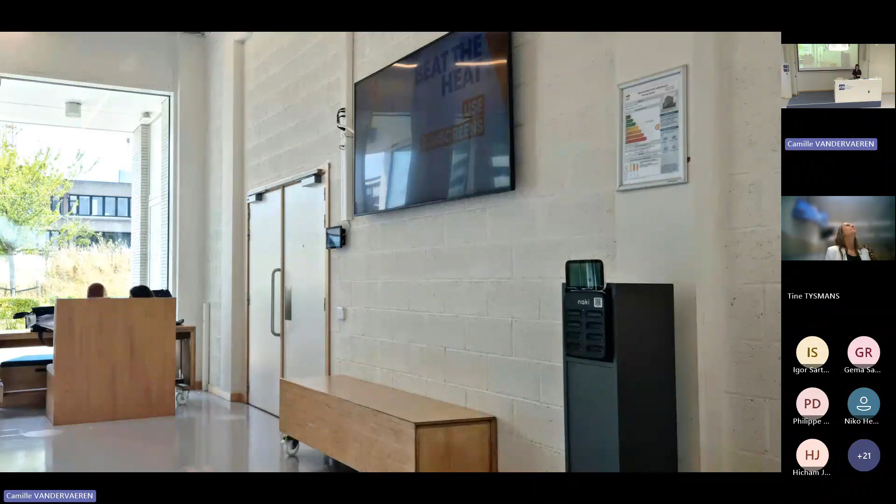Yes. Did you notice when you entered this building, you receive some building information in the form of this little signage panel that is now more and more common in public buildings in Belgium, in the EU, and abroad as well. That shows you how much energy is consumed by the building and if there is any kind of renewable energy production in this building.

And it's great because we're trying to reduce the energy consumption of buildings. We're trying to phase out of fossil fuels. But this doesn't show the whole picture, right? There is one crucial element that is not visible on this picture, and it's the material aspect. Because buildings are responsible for a large consumption of material and a large part of the waste we are generating.

Actually, half the materials we are extracting from the earth are used in the building sector. And the building sector will then produce approximately a third of all the waste that we are generating. So as architects, builders, or as anyone who is making decisions about buildings, if you are renovating your house, for example, you have a role to play in trying to reduce this material flow and reduce this waste.

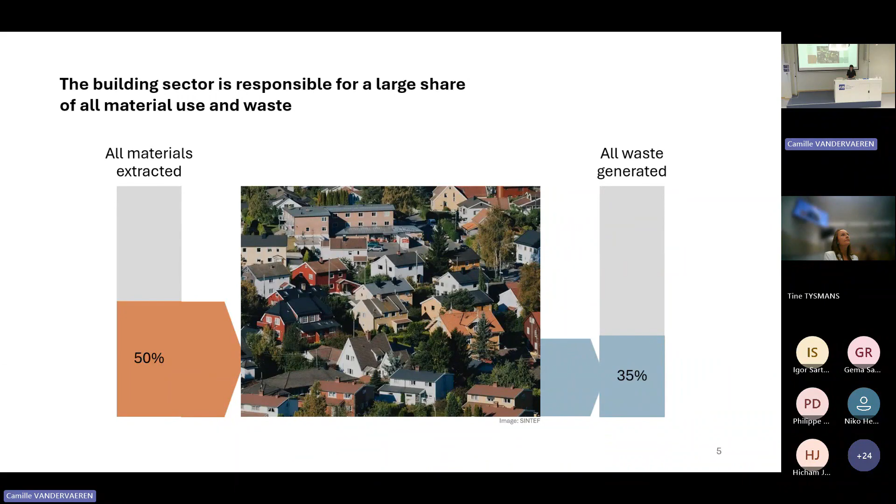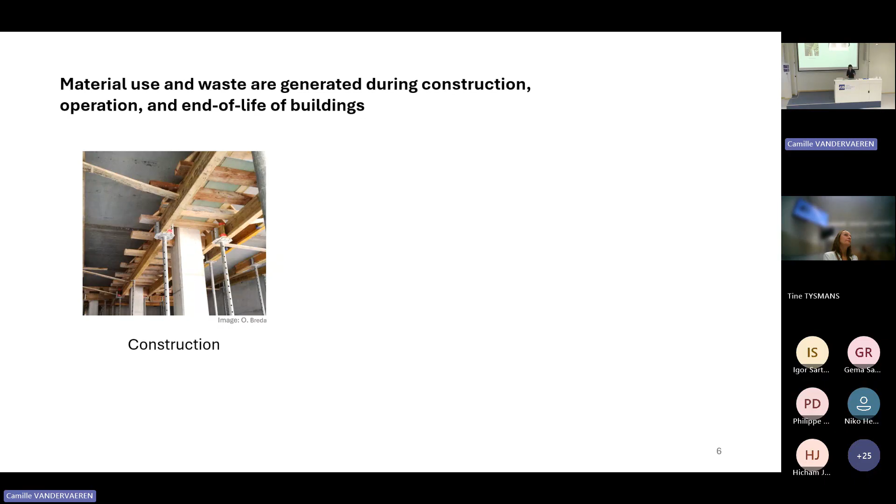And I'm not only talking about the waste that is generated during construction of buildings. As you know, there is always a container on the construction site where some waste material ends up. But there's also some waste and some material consumption during the operation of buildings. That means all the maintenance, all the repairs and upgrades we are doing to our buildings to make them fit our evolving requirements. And obviously, there's a lot of waste that is generated when we are demolishing and renovating our buildings.

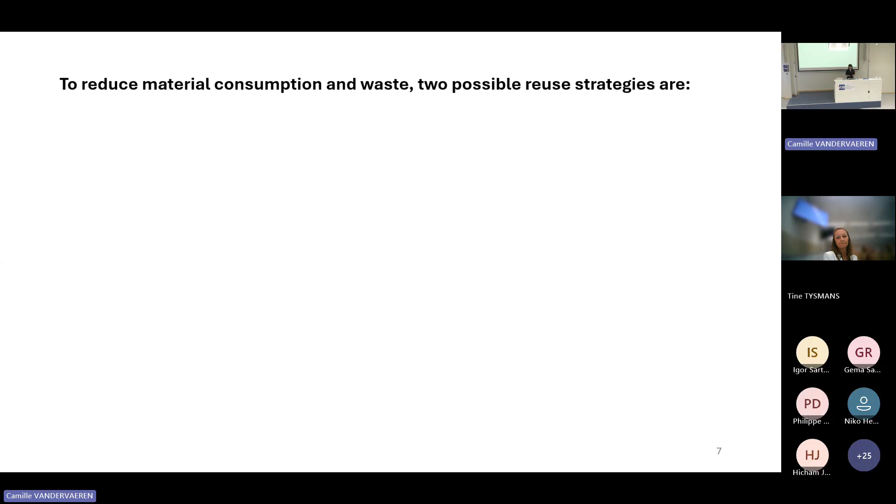So what can we do about it? Well, to reduce material consumption and to reduce waste, there is a concept called reuse that you can use, and actually two possible reuse strategies. The first one is to design with reclaimed materials. And that is not to be confounded with recycling, because reusing reclaimed materials means taking materials from existing buildings, cutting them, reclaiming them, transporting them to a new location, or sometimes somewhere else in the same building, to use them instead of using new materials.

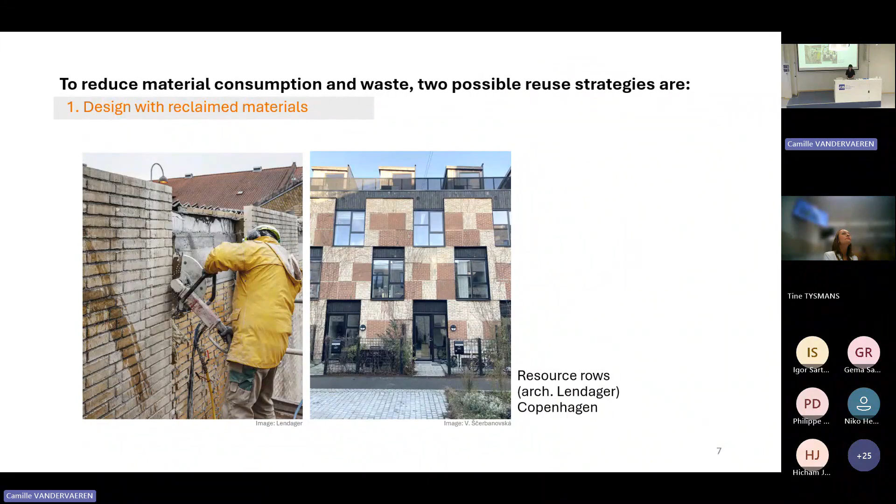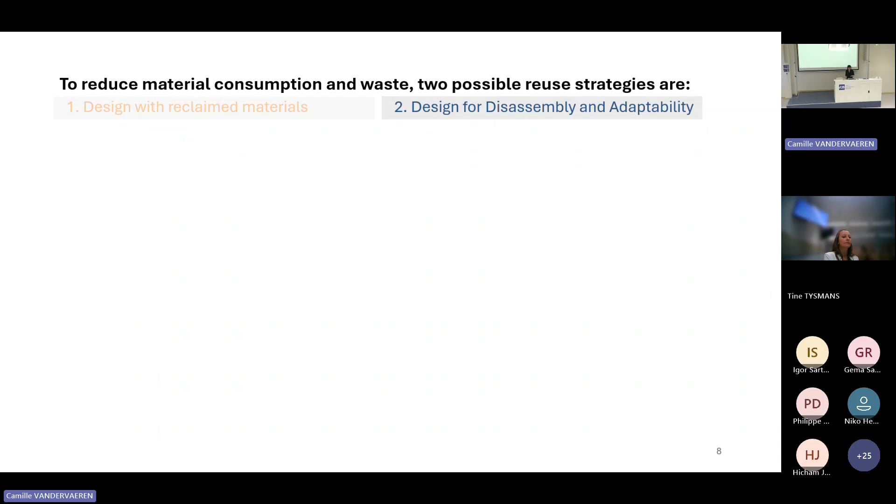And we have an example here where the architects decided to saw brick panels from a building that was going to be demolished and transport them to install them in a new building, in this case in Copenhagen. And the other reuse strategy that I will talk about in this presentation is called design for disassembly and adaptability. As we know, our needs are evolving, our regulations are evolving, what we expect from a building is evolving. So why do we want to build something static that will not evolve easily? Well, that's a problem that can be addressed with design for disassembly and adaptability.

And that means, for example, using building elements that can be easily removed from buildings with reversible connections, or having visible ventilation equipment and lighting equipment in case of necessary upgrades or repairs. And in this case, the Circular Retrofit Lab is an experimental building here on the campus of the VUB. It's testing out and trying to go a bit extreme in these design for disassembly and adaptability concepts. And you see, for example, a raised floor that grants easy access to the water pipes.

But DfDA doesn't have to look experimental or unconventional. It can also have a similar appearance as a normal house. For example, in this case, the Facadeclick system was used in this building to build a facade, not with mortar-fixed bricks, which make them very difficult to reclaim and reuse, but using a plastic insert within the bricks so that they can reuse them more easily.

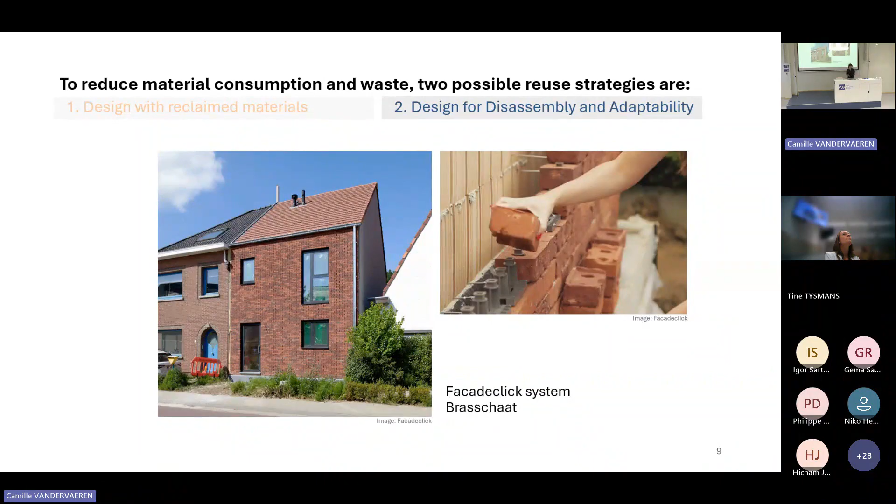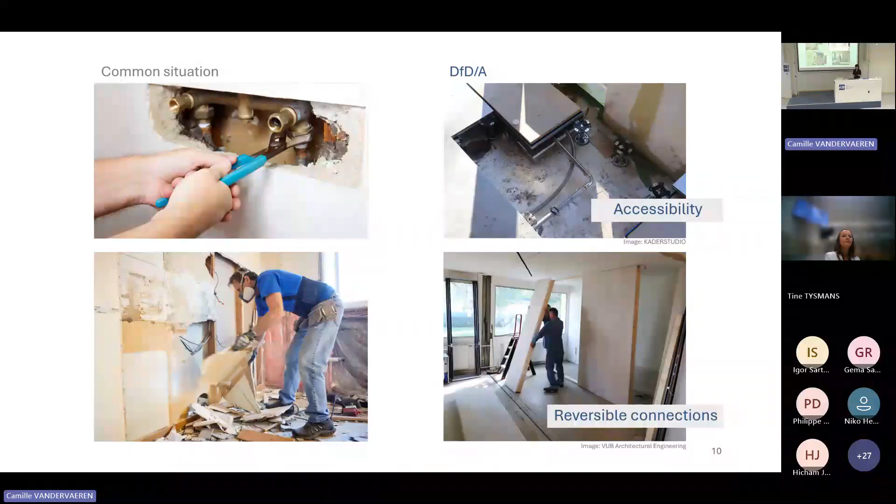So yeah, I could keep on and talk about reuse and design for disassembly for hours, but what I want you to remember for the rest of the presentation is that with the DfDA approach, it's important to have easy access to the building parts that are most often replaced or changed in a building, and use reversible connections so that we can safely and without waste change or adapt buildings.

So that is great because those strategies are becoming more and more popular, more and more put forward in architectural practice, in education, in policy. So we see that more and more, but we have to remember that it's not a goal in itself. The goal is to reduce waste and to have better material management, right?

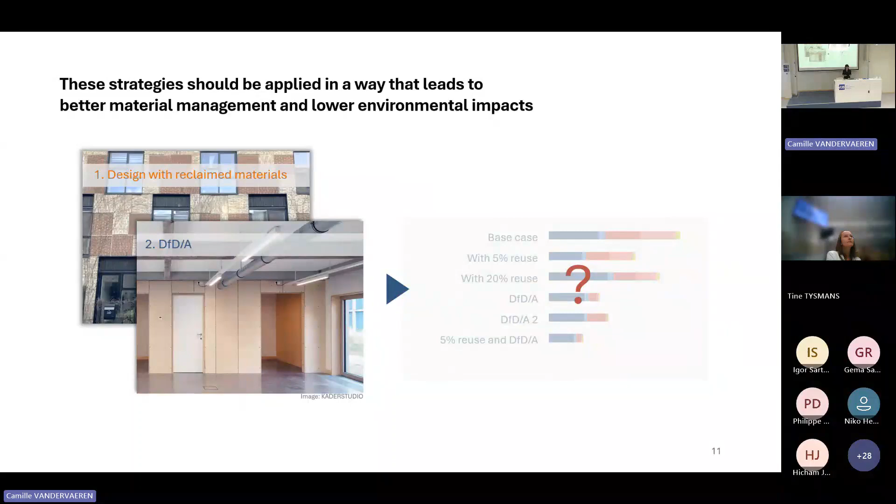And it's not enough to know that, okay, we'll use reversible connections, so we'll have a circular building, or we'll reclaim some elements, so we'll have less waste and less material consumption. No, it's a bit more nuanced than that. We want to know how much and where and what would be the impact of implementing those strategies in the building. So we want to have a way to measure and estimate the future material flows and the future environmental impacts of buildings that integrate reuse strategies.

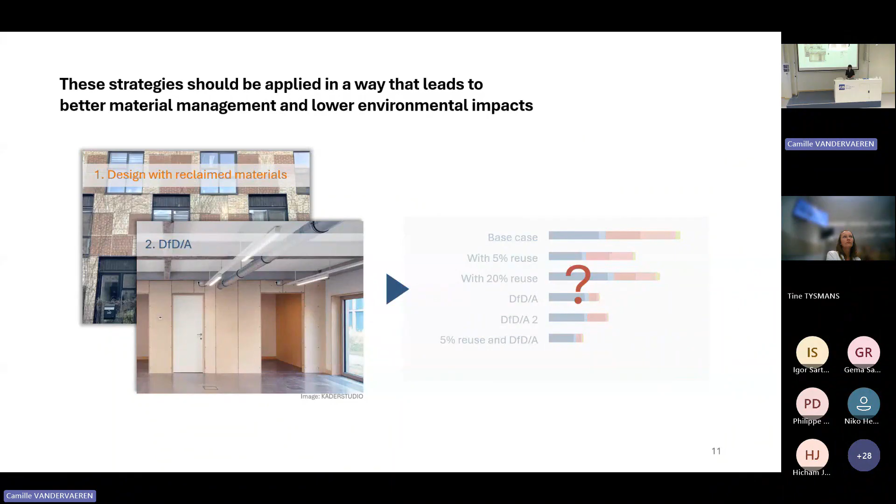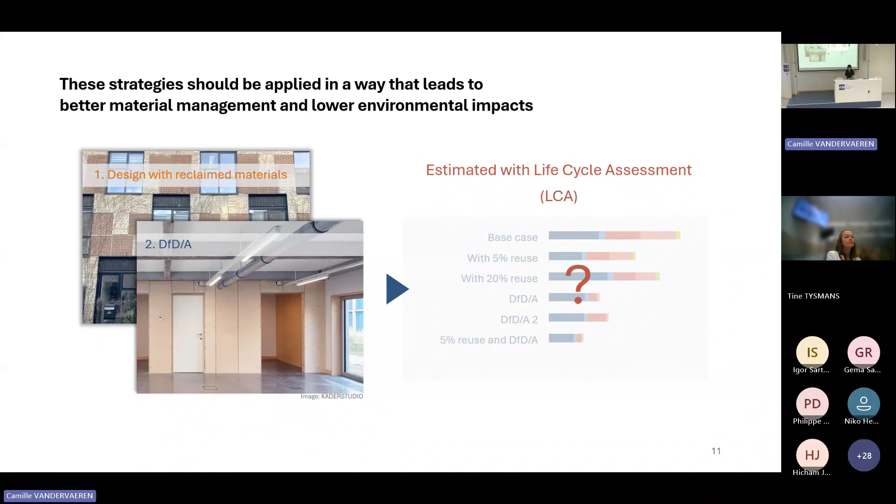How can we do that today? Well, we are lucky because there is a method called life cycle assessment, LCA, that allows us to assess the environmental impact of a building or product, and not only today during the construction, but with a life cycle perspective. So now I'm going to give you a very quick basic overview of LCA, and then I will raise some points of what I see as limitations in LCA that could be addressed with alternative approaches, and then we'll dig a bit more into two of these limitations.

So LCA uses material and energy consumption data to estimate the environmental impact of products. And to illustrate that, I will take a very simple and recurring example in LCA. Let's take an espresso machine. With a life cycle assessment perspective, we will look at the production of the machine, its use, and its end of life or disposal. And for each stage, we will look at what kind of materials, energy, waste, and emissions are taken in and generated by these processes.

So we'll have some steel and some plastic that are used to produce the machine, and that will create maybe some waste. And when we use the machine, we'll use coffee grounds, water, energy that will make coffee, hopefully, and then some coffee waste, steam. And then at the end, we will try to disassemble and treat the different parts of the machine. Right. This machine, hopefully, if everything goes well, we build it to last 15 years. And logically, the LCA will also encompass 15 years of the life cycle of the machine.

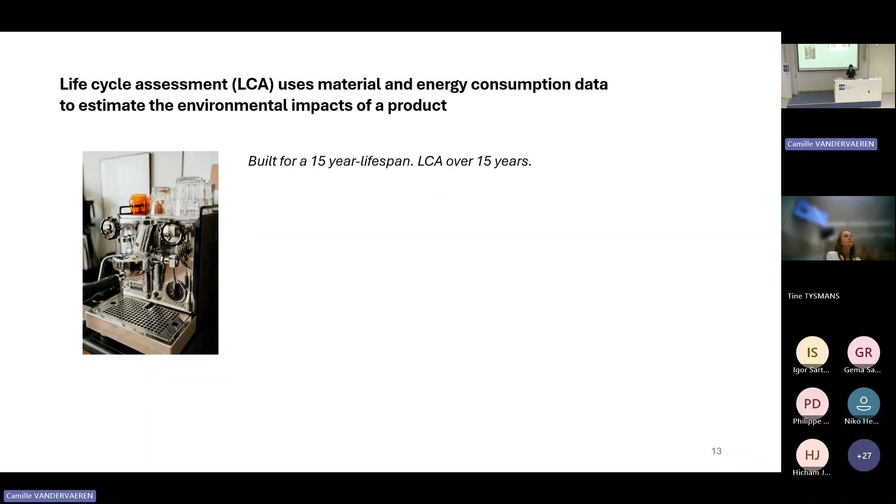Now, if we take an example in the built environment, let's say a simple brick that is made for 200 years or more. But because we use it in a building that will generally last 50 years, or have a major renovation after 50 years, we do an LCA over 50 years only. So there's already a first discrepancy between the lifespan of this product and the scope of the life cycle assessment.

And then if we are inspired by circular economy and reuse, we'll say, okay, maybe we will try to reuse this brick after the first use in a building. But in conventional LCA, there are some criteria and conditions that allow us to consider this future reuse. And one of the conditions is we'll consider reuse possible only if there is an established market or demand for this product today. Well, that's also a bit problematic if we're trying to evaluate the potential benefits of more unconventional, more rare and niche reuse practices.

And then there's another aspect: what if we use this brick conventionally with mortar, or what if we try to assemble them in a bit of a smarter way with this plastic insert that I was showing earlier? Well, in conventional LCA, there's not a clear difference between the two ways of using this brick, because of, as we'll see in some minutes, the way the conventional LCA method is designed.

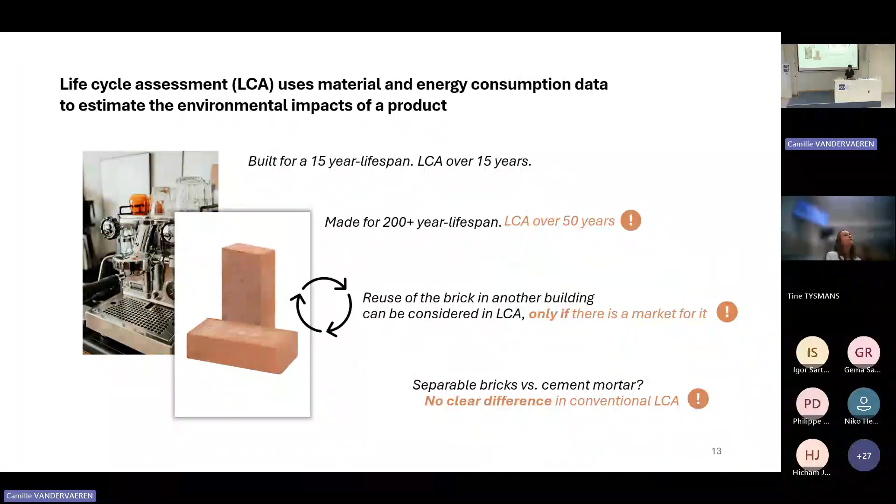So these are the kind of little issues I collected throughout the years of the research, and that led me to ask myself, okay, how can we assess reuse strategies in buildings in a more nuanced way than with conventional LCA?

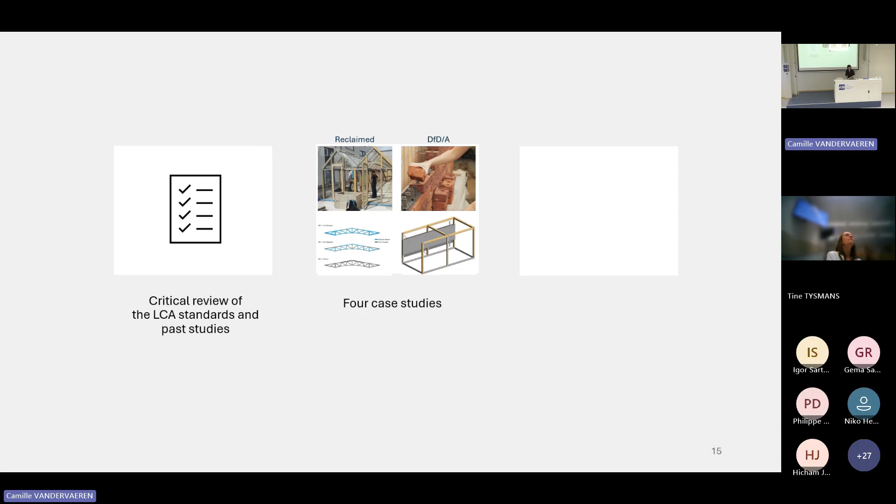And I addressed this research question in 3 types of research methods. I first critically reviewed the current standards for life cycle assessments and past studies of life cycle assessment. I also tested out these methods in 4 case studies: 2 case studies that are more putting the accent on reclaimed building materials, and 2 that are more putting a focus on design for disassembly and adaptability. And then I also, of course, consulted experts in the construction field, in academia, in circular economy and LCA.

And of course, this was a bit of an explorative approach based on reviewing critically the current use of the standards, what kind of information they give us, what kind of information they omit, and how we could do things differently to, in the end, inform the design decisions and guide the application of reuse strategies in buildings.

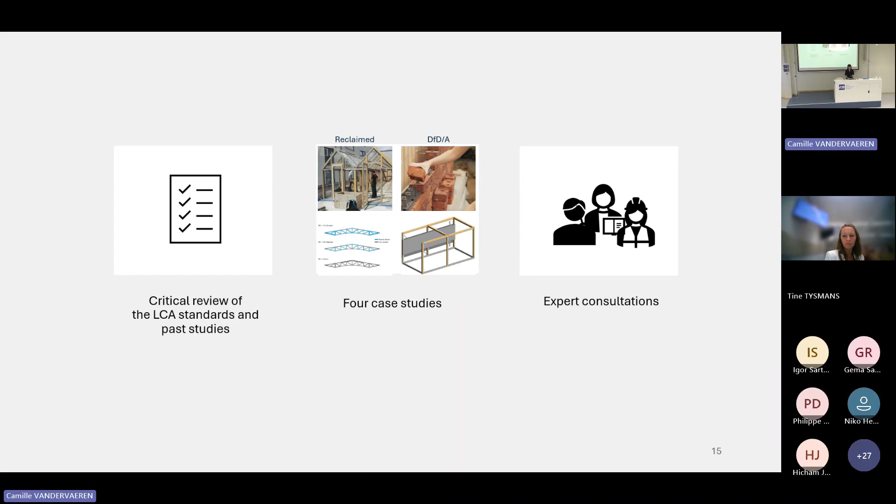And that led me to develop 2 sets of contributions. A first contribution, which is putting the accent on the methodological choices in LCA, so alternative definitions of the functional units of the LCA, the system boundary, and scenarios. And the second contribution that is then putting more the accent on the modeling of the use and reuse of building parts in the inventory phase of the LCA.

And there is one term here that's important to clarify before we go ahead and dig into each of these aspects: the system boundary, because it's quite important when you talk about reuse in LCA. And if I come back to my example of the espresso machine, the system boundary is this artificial limit we set around the life cycle of products and the different materials and processes that we include in our assessment.

Because, of course, in an LCA, you could go upstream and upstream and upstream, and from the coffee ground, look at the soil in which the plant grew up, and then come back and back and back. So we could go back to dinosaur time if we would not put a limit: okay, this is what matters, this is what we want to include in the assessment, and this is what we leave out because it's less relevant to the system that we want to assess.

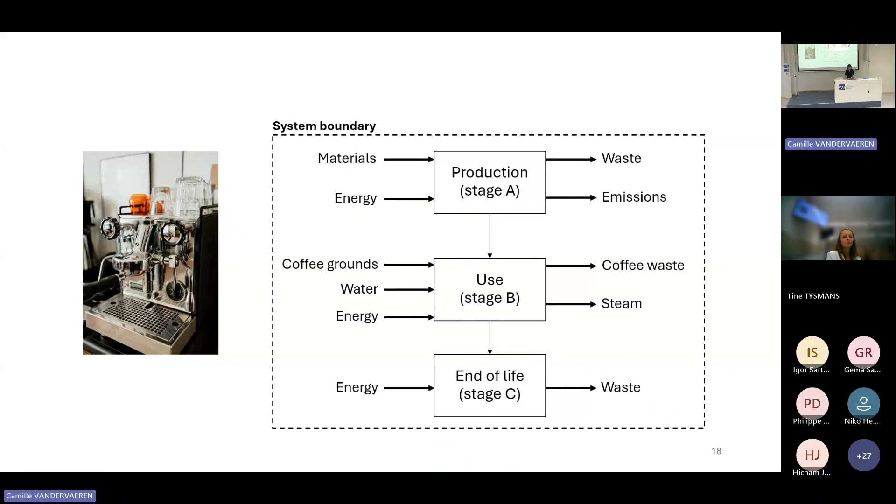Yes, so let's dig into the first set of contributions. For that one, it's a little bit more of an exploratory approach, and I used 3 case studies. That's how I will structure these parts. I will not present them all now, but I will explain them one by one. The first case study was

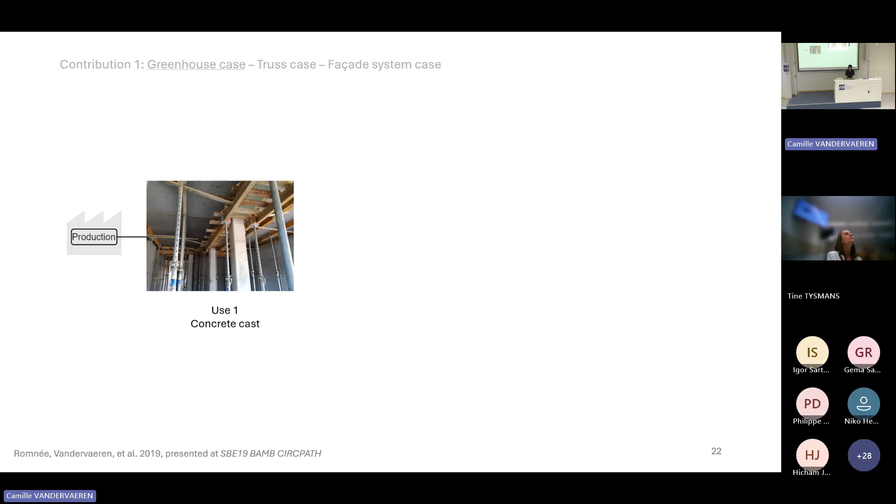and could be useful for a second life. And decided to create an urban greenhouse with this leftover wood or wood waste, and also collecting glass panes from old windows that have been replaced from buildings. And then he said, okay, why should we only design the greenhouse for one use? Let's make it modular and use reversible connections, so maybe we could transport and relocate it to a different place if needed.

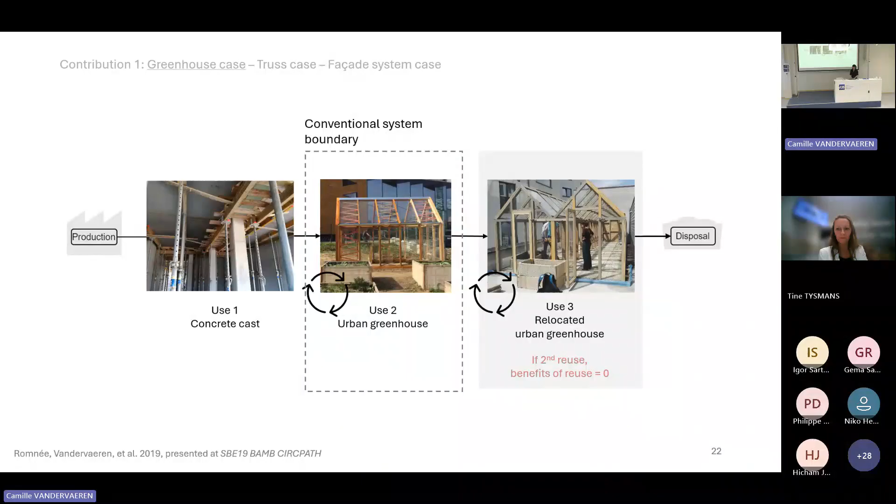Okay, that's great, but with a conventional LCA, typically we would set our boundary on this second use of the wood and the glass panes, and the third use, the second reuse, would be declared outside our system boundary. Because of the way conventional LCA is currently set up, we cannot claim benefits from using this material a third time. So how can we actually account for using it in closed loop, so in a circular way?

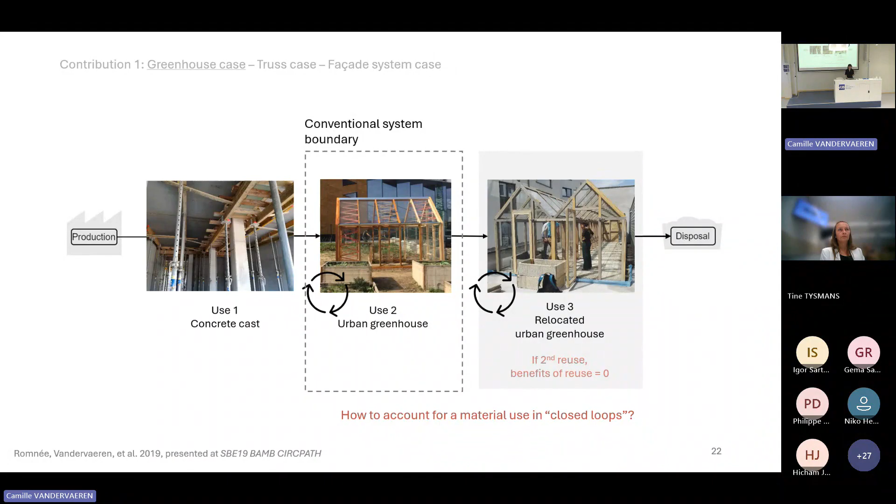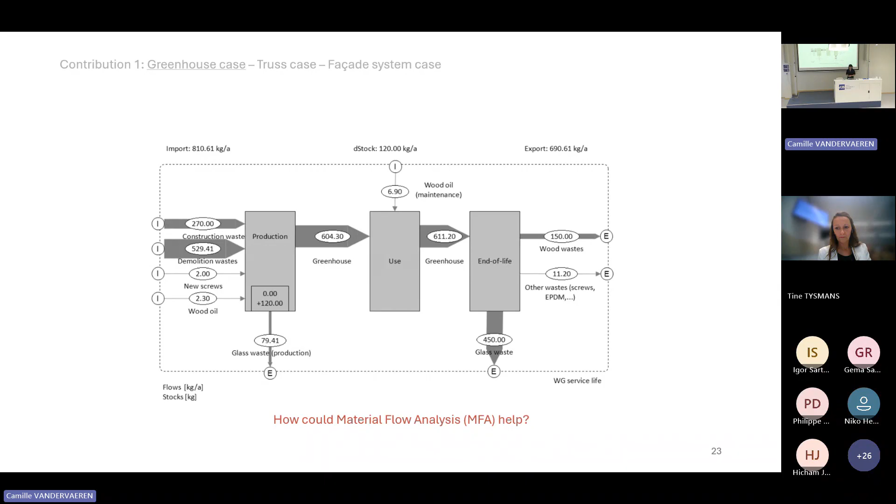Yeah. So a scheme of this greenhouse, with the production phase of the greenhouse, the use and the end of life, as we saw before. So that is a conventional one use of the greenhouse. But what if we would have flows coming back into the production stage thanks to this demountable and adaptable design? That could be a way of including in the assessment the benefits of having the DfD approach to the design.

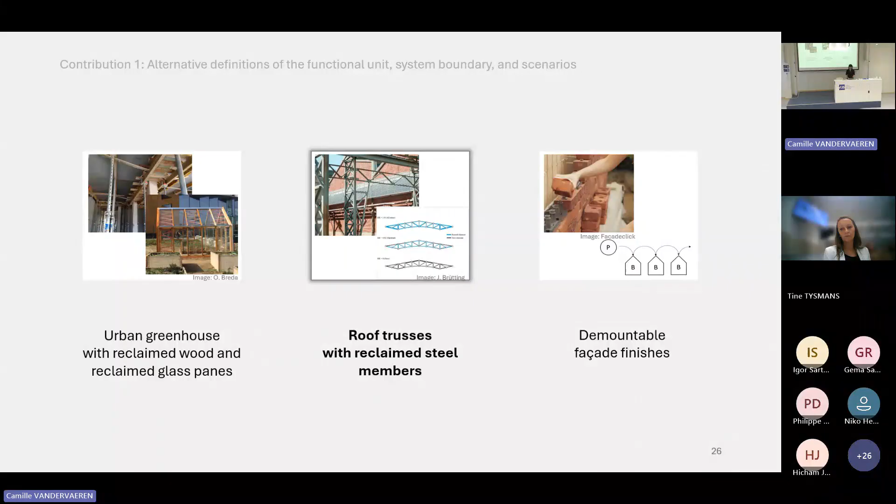I hope it's okay for those. You want me to switch to a different microphone?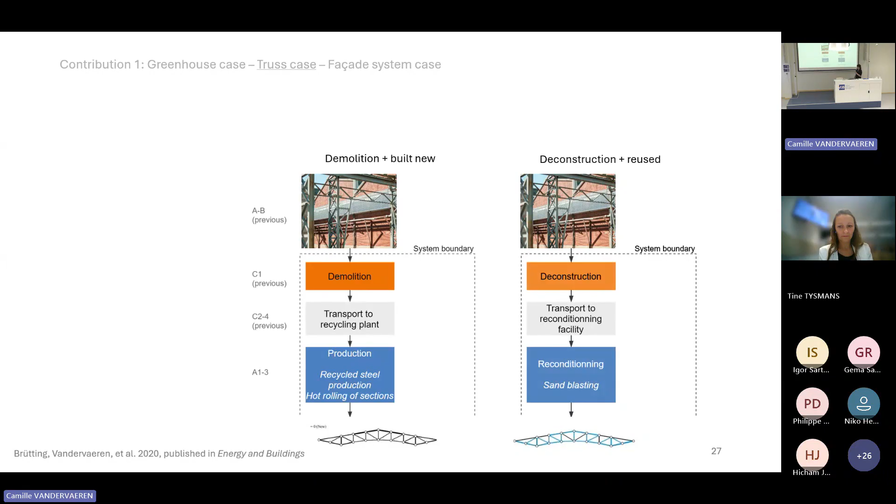Okay, good. Yeah, so we could demolish or we could deconstruct, right? And if we deconstruct, maybe we could sandblast the parts and reassemble them into a roof truss or a structure to have a roof of a building. And we would like to compare this with the more conventional approach of demolishing the building, transporting the elements to a recycling plant, and then recycling the steel into steel members for this, let's call it new recycled truss.

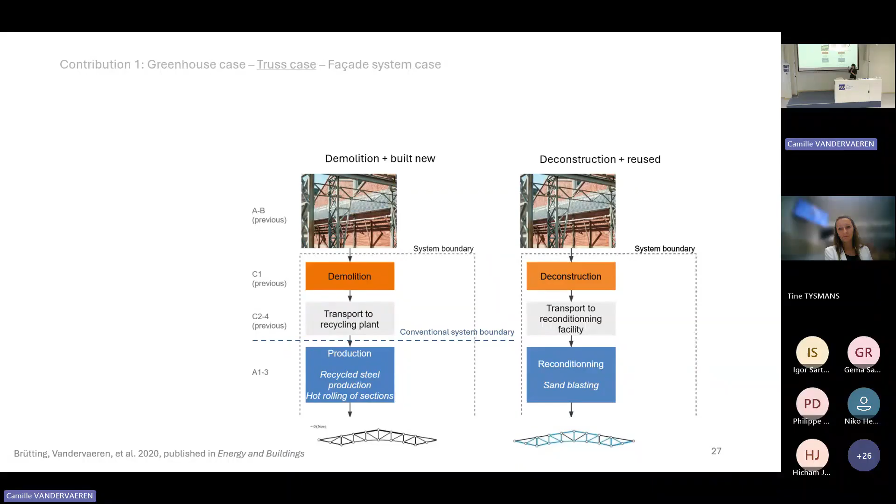So how to compare those two systems? It's a little bit problematic in the conventional LCA approach because typically we would put the limit between previous building and this building at this stage. But we want to have a fair comparison between the two systems, the reused one and the recycled one. So we decided to adapt the system boundary so that we can more easily compare or have more insight to the impact of both approaches.

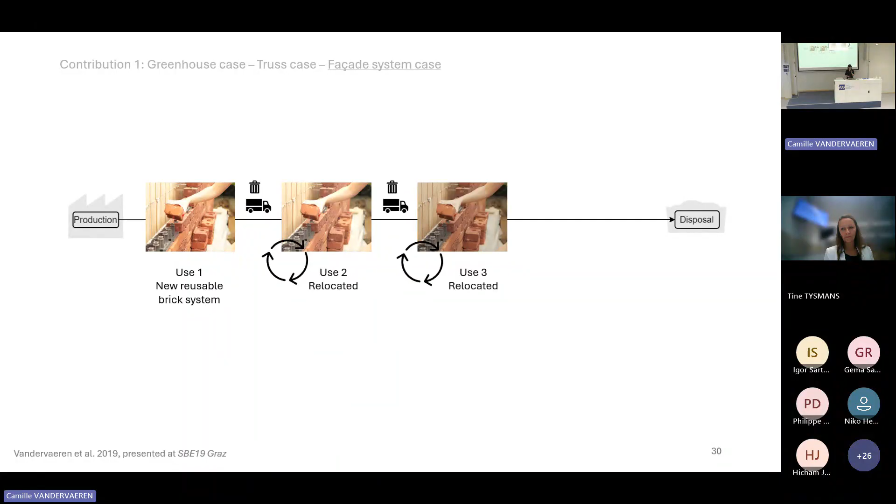And then in a third case study, that is coming back to the brick that I was presenting earlier, the one that has a plastic insert and that can be disassembled and reused up to 5 times. Well, with a conventional approach, system boundary would typically include the first use and put the first reuse of the brick in this module called module D, and would not include any subsequent use of the bricks.

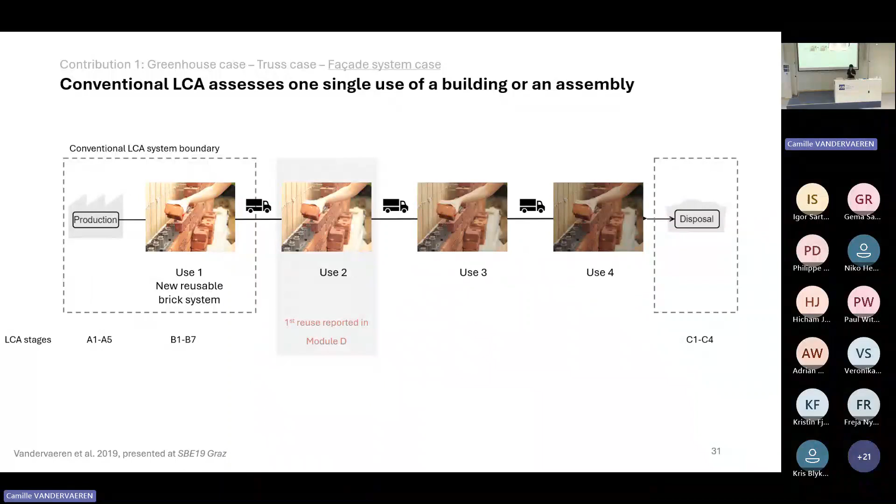Well, that's not helping us because we want to understand what is the impact of reusing this material 3 times, 4 times, or what is the effect that different transport distances have on the benefits of reuse or the different material losses. So instead of that, we could actually expand the system boundary and include the different uses of this reusable building part into the system that we are evaluating.

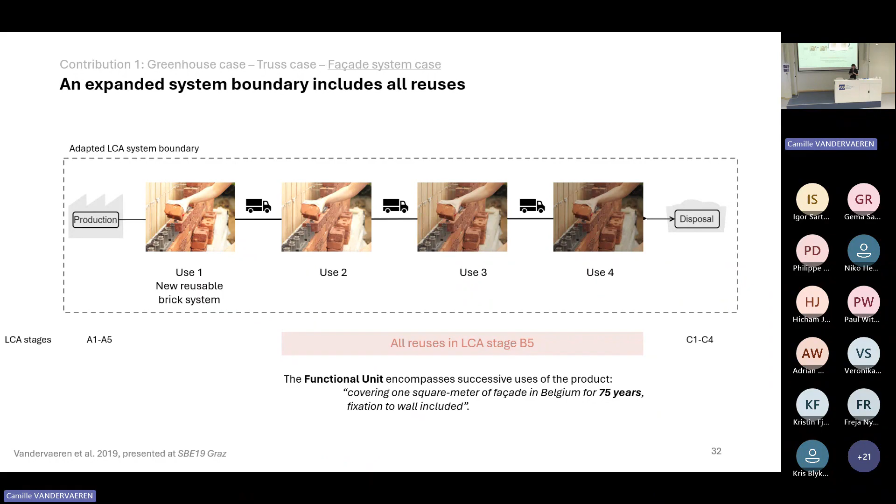In doing that, we need to adapt what we call the functional units in the LCA, so this declaration of the functional performance of the product. And well, instead of phrasing this functional unit as one use of the product in one building, maybe typically 25 years, the replacement rate of the finish layer of a facade, we could have a bit of a longer use of this product so that these different uses are included in our system.

So in conclusion, in this first contribution, I have tried out different definitions of the system boundary, of the functional units, and of the use scenarios. And that revealed that with those adapted definitions, we can get some different kind of insights on the impacts and the comparison between reuse approach and a conventional approach, and also different aspects or different scenarios in reuse strategy.

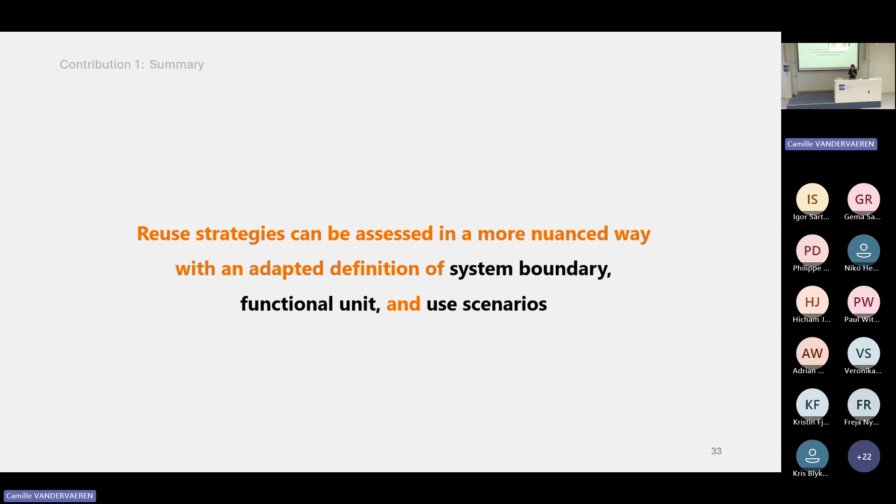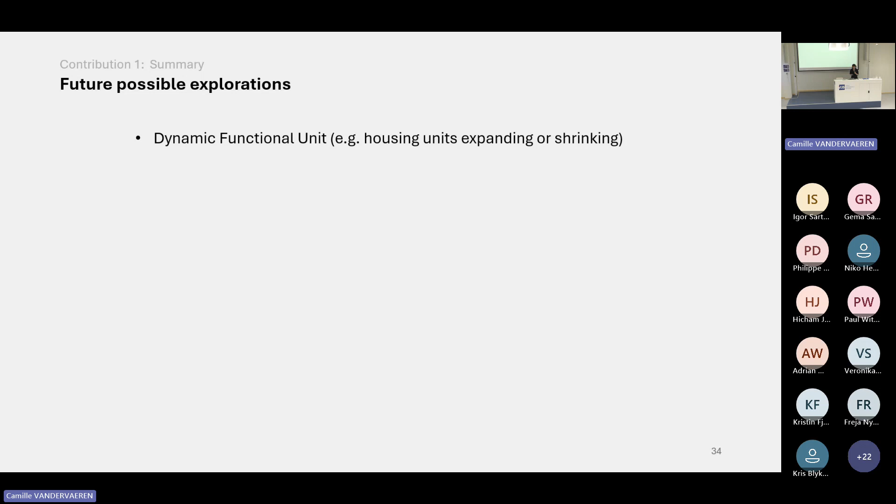But of course, that doesn't answer all the questions, it actually raises more questions. And if you're interested in the detail and the actual results of this life cycle assessment, I encourage you to read the book. But here I will just mention two possible future explorations that I see. One is to look at the way we phrase the functional units and have possibly a dynamic approach to the way we frame it. And that could be, for example, inspired by the work of Charlotte Camille.

In her master thesis, she assessed the life cycle costing, so the costs on the life cycle of a building, but comparing conventional building to expandable building. So houses that grew with the size of a family when you have more children or you need extra care or help at home. And another possible exploration is the aspect of the material rebound effects of circular strategies.

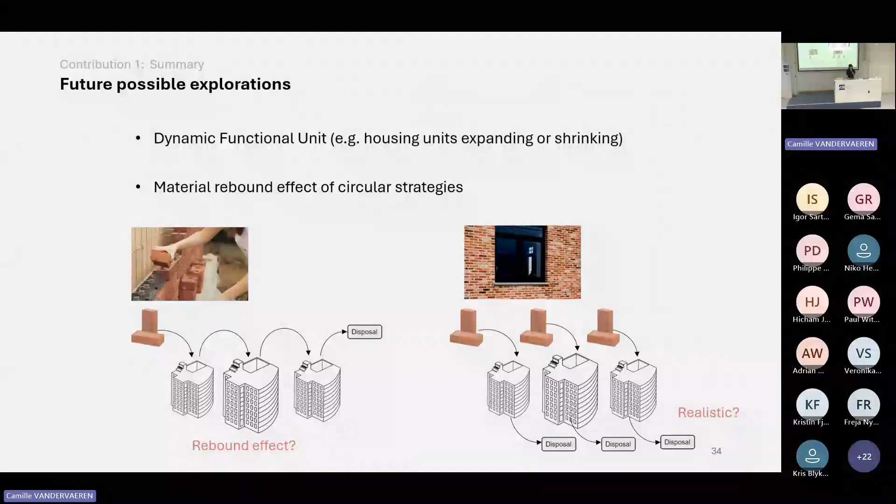So in the brick case study, we compared this demountable facade that is going to be used in different buildings and then eventually disposed of. We compared that to a conventional facade that is used the same number of times. But one can wonder if it's actually realistic to compare 3 times the construction and demolition of a facade to this reusable facade. Maybe because our product is demountable, we would like to demount it or change it more often than the conventional product. So there might be some kind of rebound effect because it's demountable, so we might need to or want to reuse it more.

Yes, so that was the first contribution of this PhD research. Now we'll move on to the second contribution, which is the building approach considering dependencies between building parts.

And for this approach, I will first present this contribution. I will present you the conventional approach to model replacement in buildings. I'll show you what's the proposed alternative approach and what it looks like when applied on the case study.

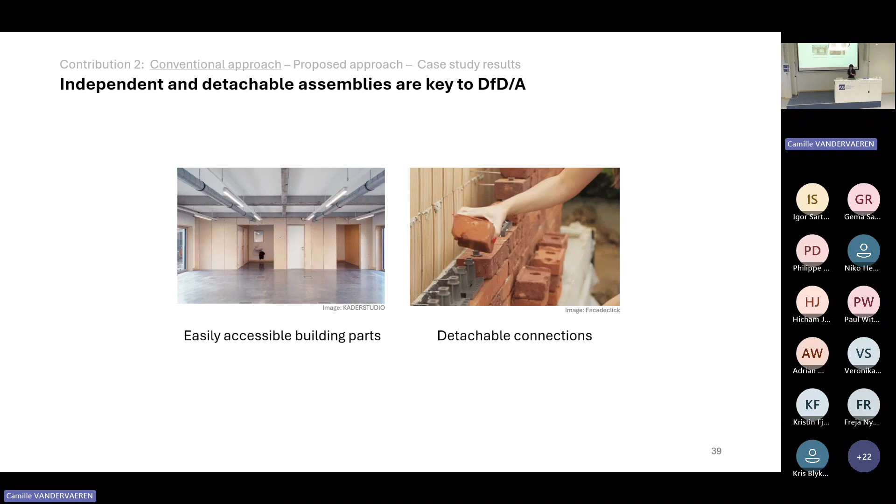The conventional approach to evaluating replacements and future changes in buildings is quite simplistic in the conventional LCA standards. If you remember, these two aspects were critical and very important in design for disassembly and adaptability: having easy access to building parts and using detachable connections. But what we see in the LCA standards is the number of replacements of building parts depends on two parameters: the lifespan of the building and the lifespan of the building parts.

So imagine we have a building that will last 50 years and a pipe in the building to have 10 years lifespan. Well, it will be replaced 5 times. It's 4 times, so you use 5 times 10 years. But this method or this equation does not take into account what is the accessibility of the pipe. Is it demountable? Is it modular? This is simply not in this equation.

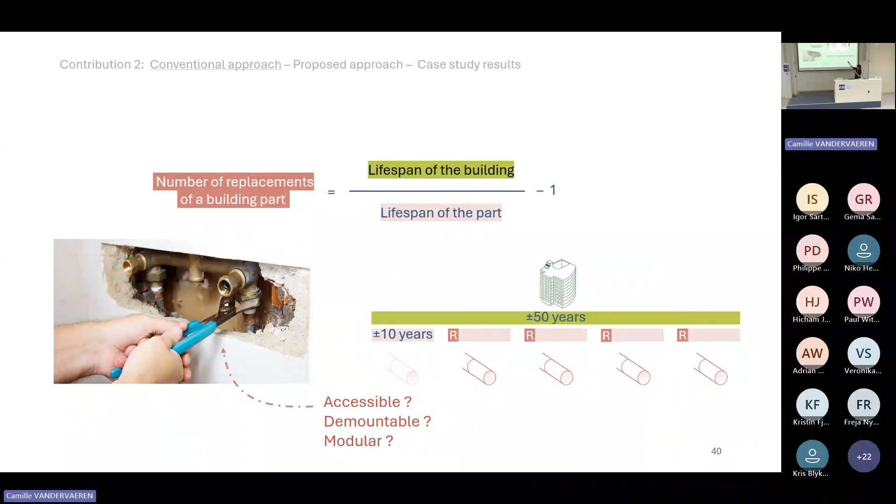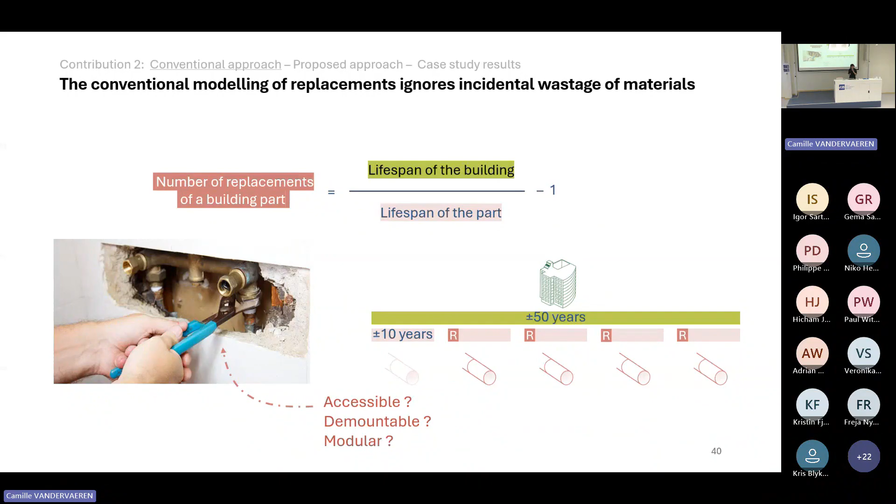So possibly some waste or some incidental wastage of material is not captured by this equation. And also, if an architect would want to design for disassembly, this is also not captured by this approach. And that is problematic when we want to use LCA to support better informed design decisions. We would like to know how much waste is generated, how many parts can be reused, and how many new parts need to be installed in the building to replace those lost parts.

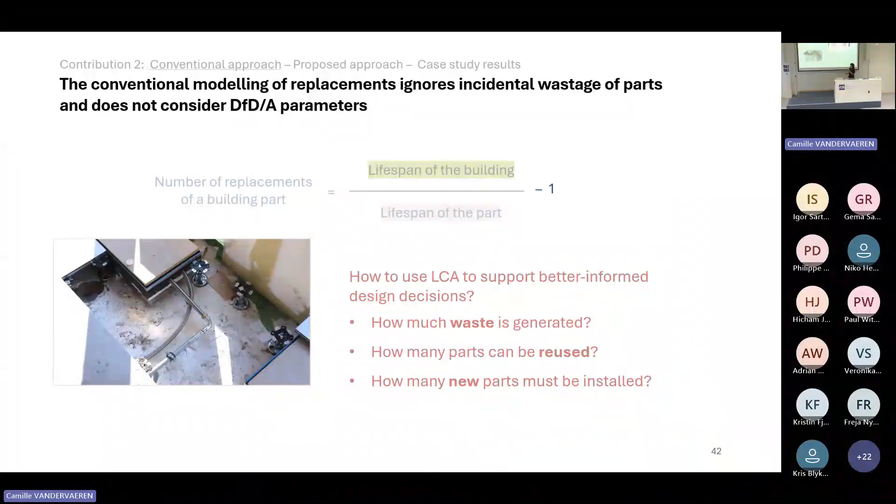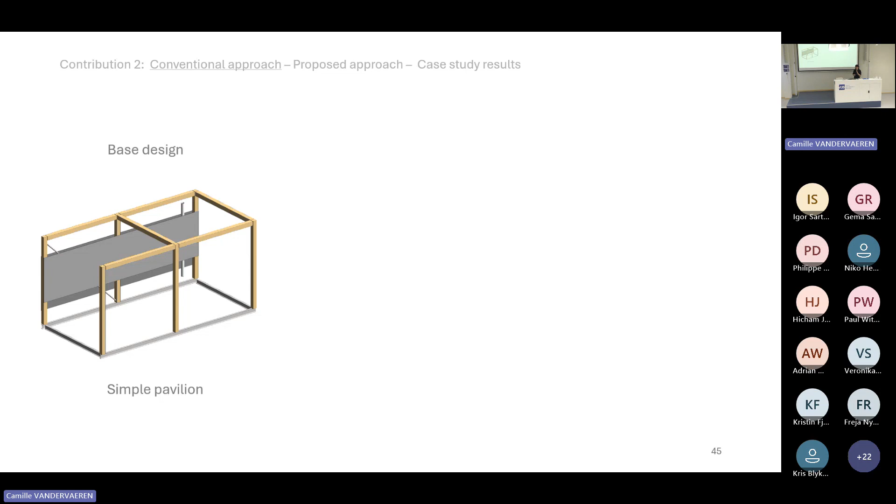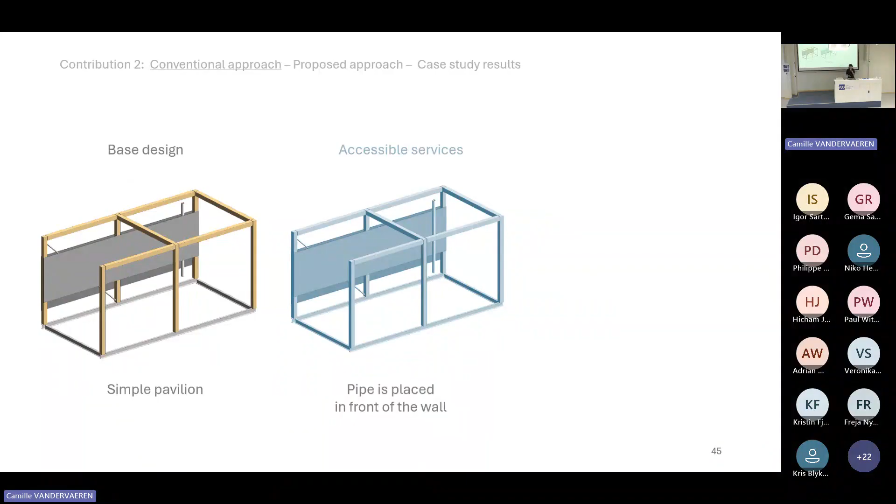So if an architect would design a building with the different parts of a building, what would be the effect of using reversible connections, or what would be the effect of non-reversible connections? So that's one approach, and another option is, if we had a base design, how is this base design comparing to an alternative design where the pipe of the building or any kind of technical equipment in the building, instead of being placed inside the wall, is placed outside, and thus more accessible to make the necessary changes and upgrades.

And then we could have a third approach or third design that is more modular, and where the panel of the wall is split in two, so that if we need to access this pipe, we can only remove half the wall and make the necessary changes. So as I said, with the simple equation that we have today in the standards, all these different designs, so the spatial designs and the 2 types of connection, all have the same life cycle assessment effect, because those different parameters are not part of the equation.

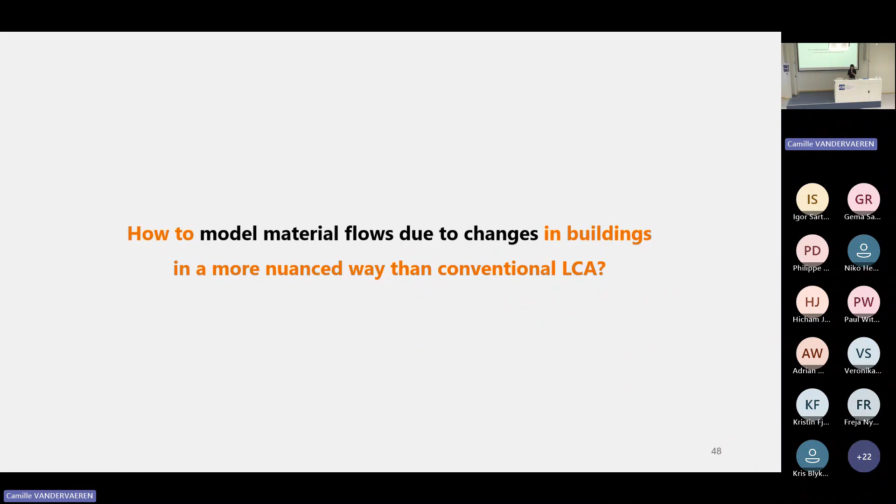And that's not what we want. What we want is a more nuanced comparison of these different design alternatives. So this is what we want. How do we get there? The question becomes how to model material flows due to changes in buildings in a more nuanced way than conventional LCA. And that brings me to the proposed approach.

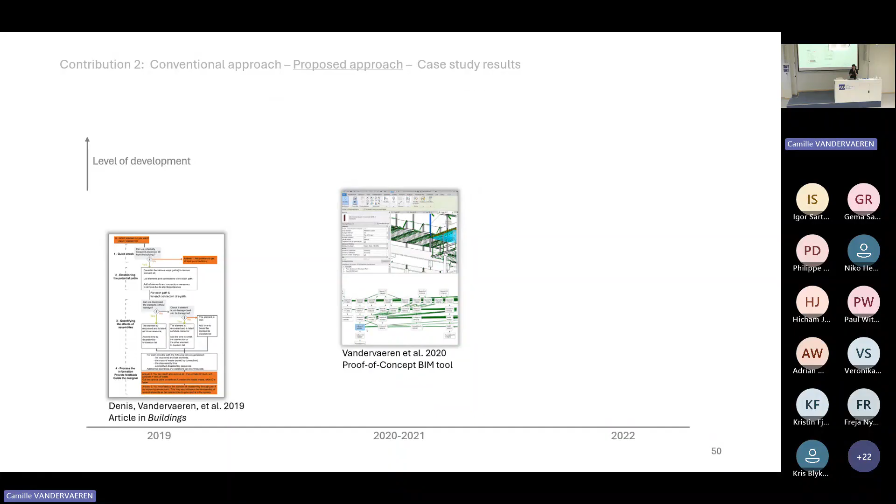And of course, we don't start from scratch. We are inspired by previous research that has developed life cycle assessment and life cycle costing approaches for elements. But these approaches were designed for layered elements, like walls, ceiling components or flooring components, where you have a layer by layer approach of assessing the demountability of the component. And that is a good start, but not what we need for having a 3-dimensional assessment of the demountability of a building.

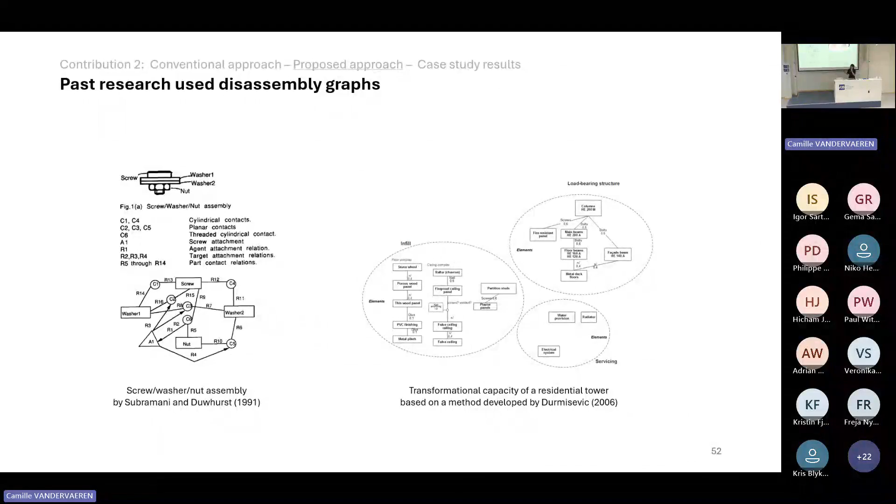And what's been inspiring as well is research in product design and product disassembly modeling, like we have here in the 90s, as well as researchers who have conceptually adapted this product design approach to the building.

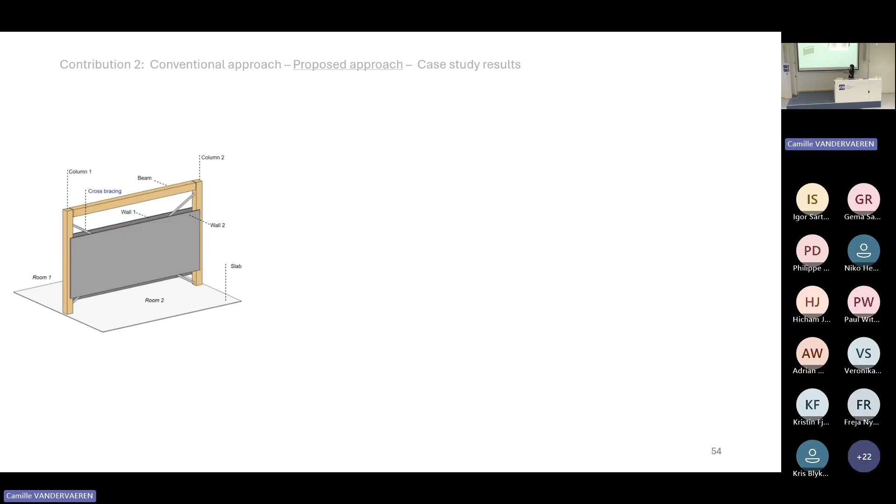So the approach that we're proposing is to start from the model of building with different parts, different components, and I will here use an even more simple case just to show you step by step how this method is working. So let's take a portico model, just 2 columns, a beam, a cross-bracing element, and 2 wall panels. This model is then translated into a network graph where the different nodes of the graph are the building parts, and the arrows between different nodes are the structural connections between the building parts.

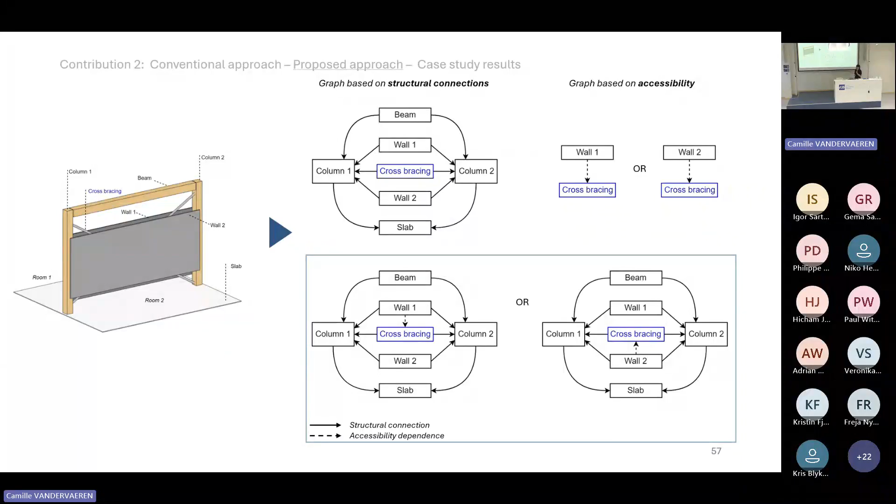Those two network graphs can be merged into a combined graph, which then shows you all the structural and accessibility dependencies between building components. And so to reach that, we can start from there, remove the connection between wall 1, column 2, and wall 1, column 1. Or the alternative approach is to start from wall 2 and then disassemble the connection between wall 2 and column 1 and 2.

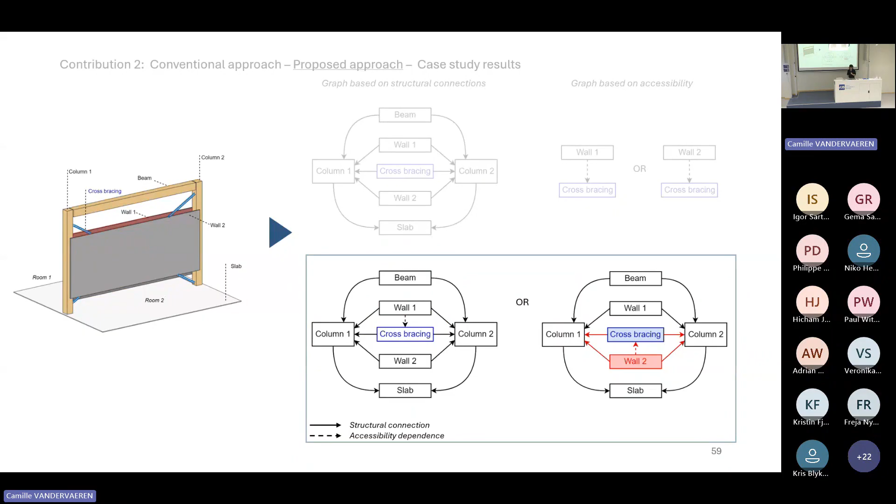Of course, I'm showing you a simplified step-by-step method. In reality, this method is a bit complicated. We have behind each node of the graph metadata that carry information about not only the mass of building parts, but also the cost, the impact. And so we could optimize disassembly according to different parameters like time, cost, or weight.

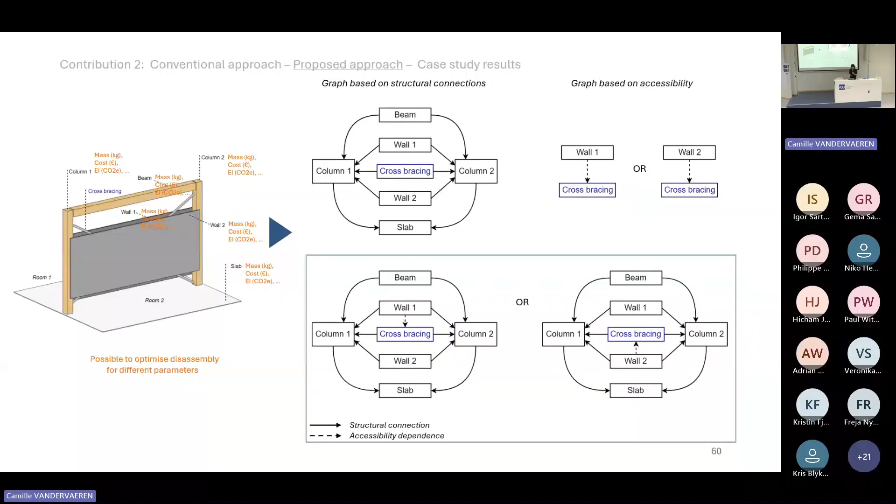Just to summarize, we start from a building model including parts, connection between parts, and how they are spatially composed. We translate that into a network graph of structural and accessibility constraints, and that gives us the disassembly sequences. So the sequence of parts and connections that need to be disassembled and removed to access the target part, which in this example is the cross bracing.

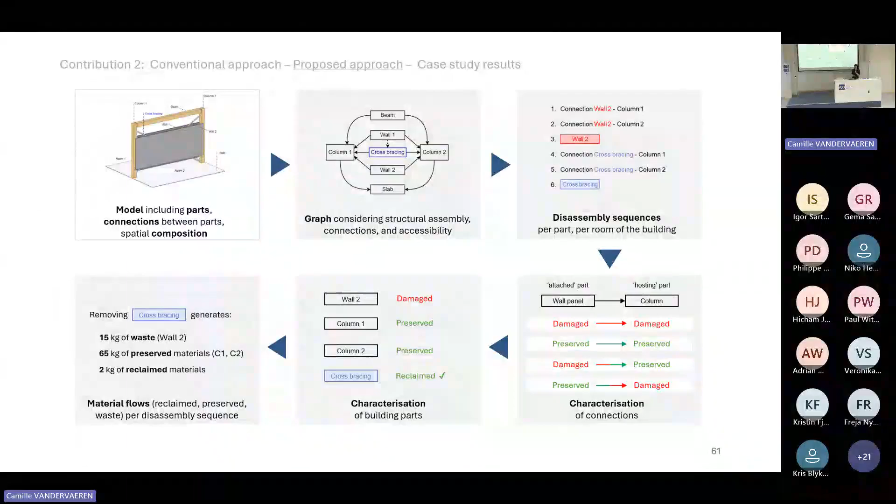From there, we can then characterize the connections, whether we have reversible or non-reversible connection, or a mix of connection that will preserve one of the two building materials, either the attached part or the hosting part. Thanks to this information, we can then sort out in the preserved flow, in the damaged flow, or reclaimed flow. And that then gives us how much waste, how much material can be used, and how much new materials need to be introduced in the building to replace the damaged equipment.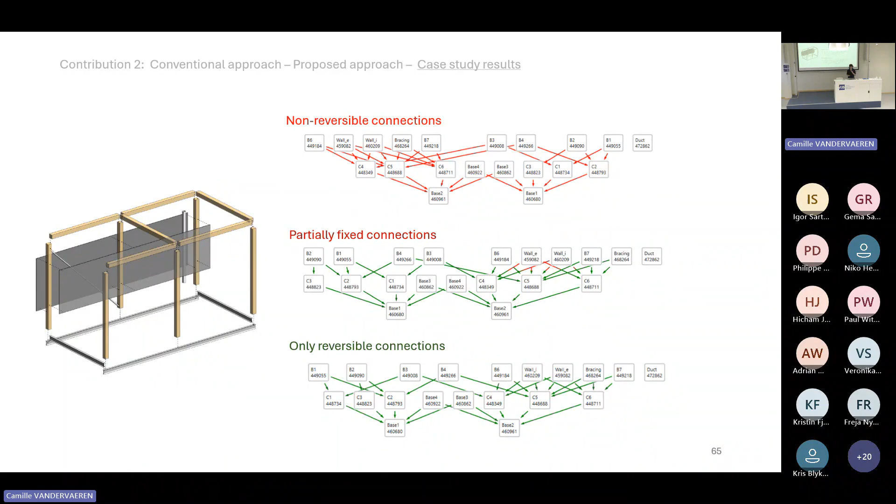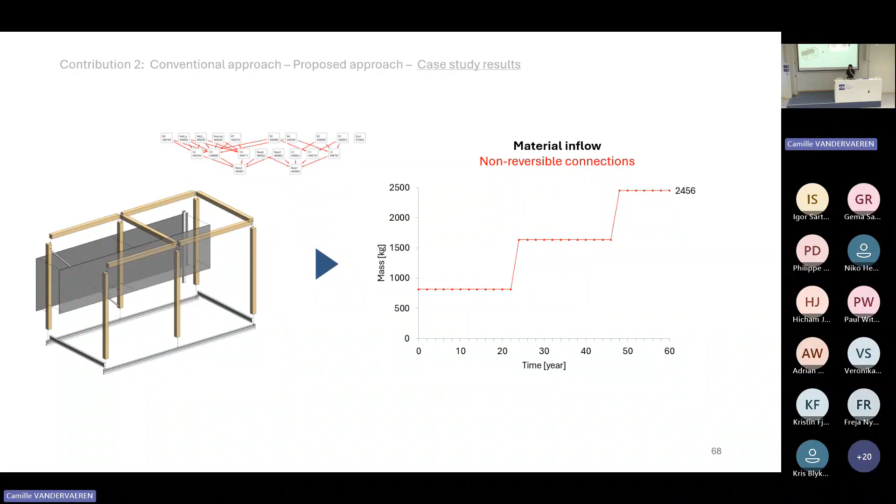With this graph, we can start to see the differences in material flows over the lifespan of the building. And we can compare that to our second design, the partially fixed connection, where then we see one graph. And again, this non-reversible design where every time something needs to be replaced, then the whole pavilion needs to be replaced, which is unrealistic, but just to show you the range of material flow we can expect over the service life of the building in some extreme cases.

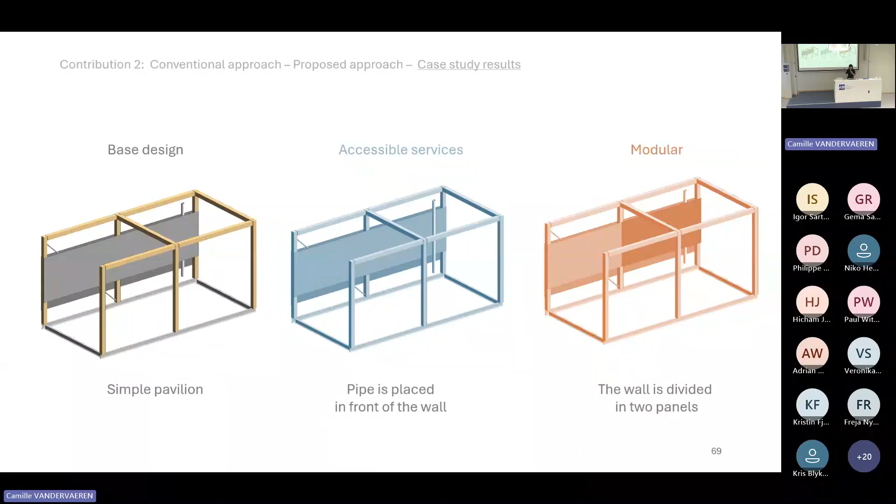That was for the different kind of reversibility of connections. Now, we can also look at the spatial designs, the base design, the accessible one, and the modular one, and combine them with the other connection designs to have nine design alternatives, which we can compare with those graphs, but also with a material flow or total life cycle assessment impact for the different connections.

And there we see that even with fixed connections, so non-reversible connections, where every time we need to make a change both components are damaged, with a base layered and accessible design in blue, we can actually manage to reduce the environmental impacts of the building by half. So it's quite good. And of course, this is a simplistic case. A building like that cannot be built, but it shows you the range of information we can get from applying this kind of approach.

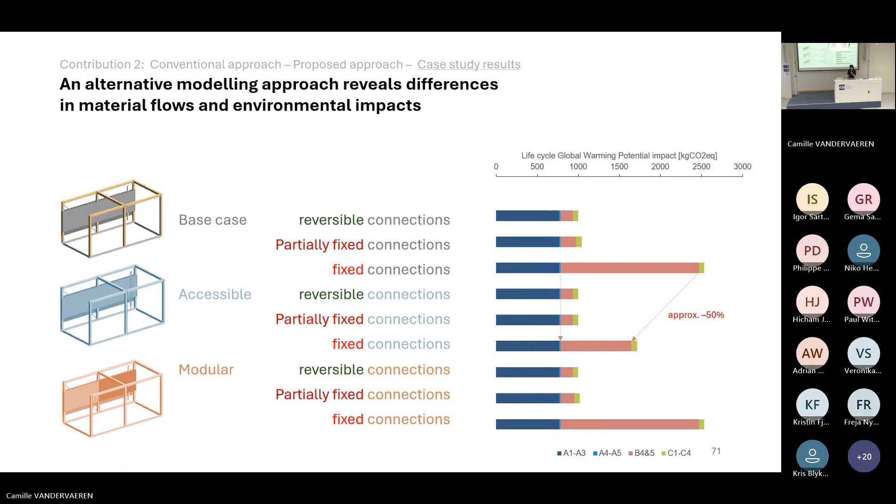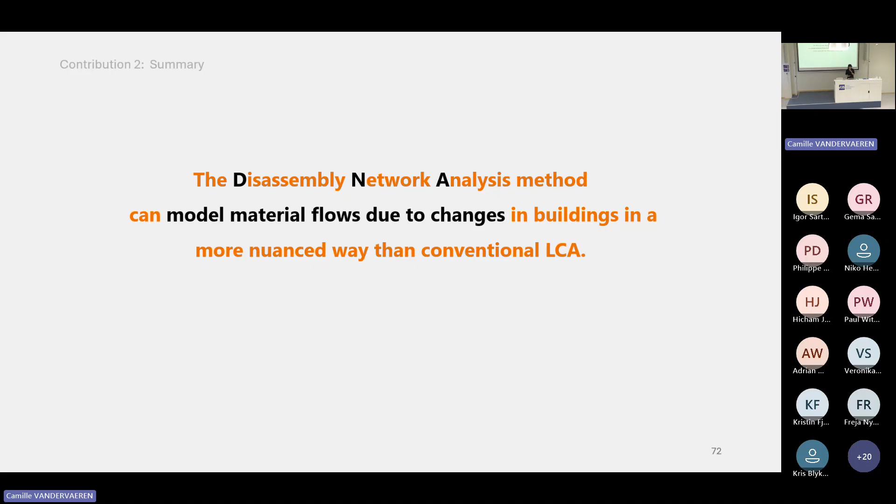And so in summary, this approach that is called disassembly network analysis, or DNA, can model material flows due to changes in buildings in a more nuanced way than conventional LCA, because we see the differences for the different designs. And it's more a dynamic approach because we see the impact changing over the service life of the building.

And secondly, it's also a bottom-up modeling of material flows, and it means that we can link the impacts of the material flows with specific parts, specific connections of the building. So it's a little bit more nuanced. You can see, okay, if I would have to change one aspect of the building, then this part or this connection could be made reversible to save some material on a life cycle approach.

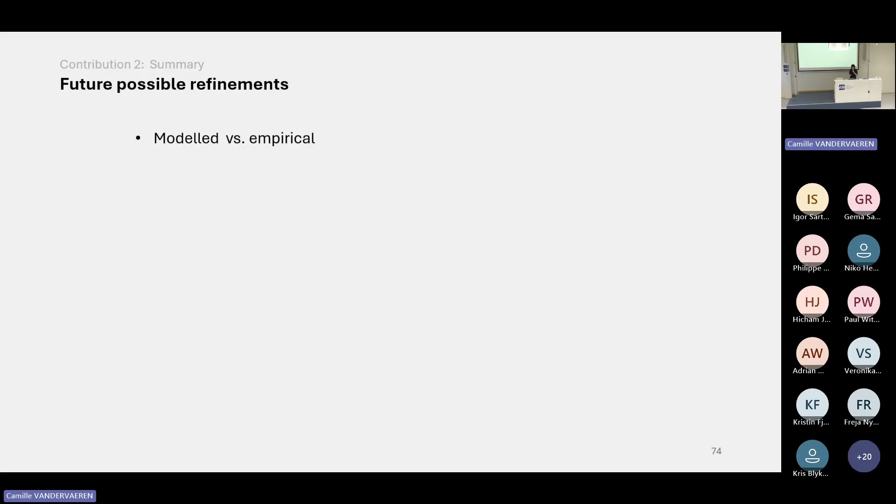And yes, it's a first conceptual method, and it could be refined in different ways. One way to refine it, I think, would be to compare the modeled material flows with material flows that we would measure empirically. And this is something that I have actually started doing with some experimental disassembly of wall setups.

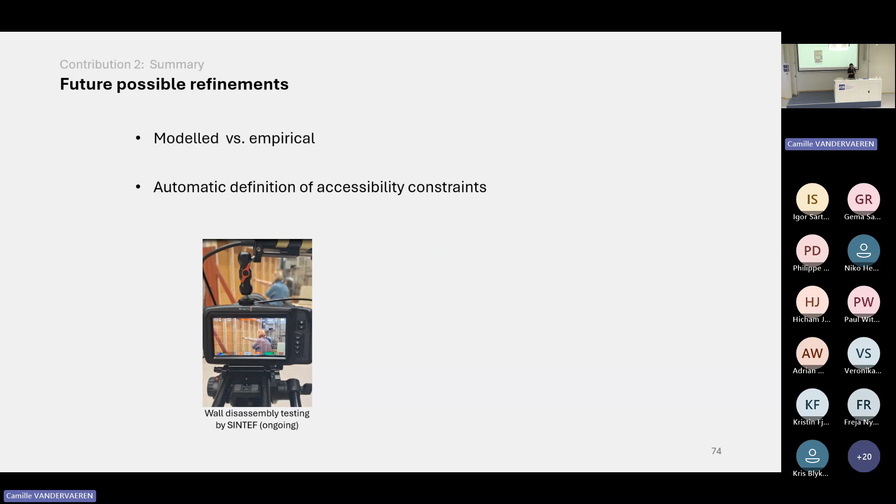And secondly, it could be interesting to refine the way we define accessibility of parts. Currently in the method as it stands, the user has to provide this information into the model. But there might be a way to get this information automatically using building information modeling. And this is actually something a master student started working on and developed a plugin for automatic detection of the accessibility of building parts.

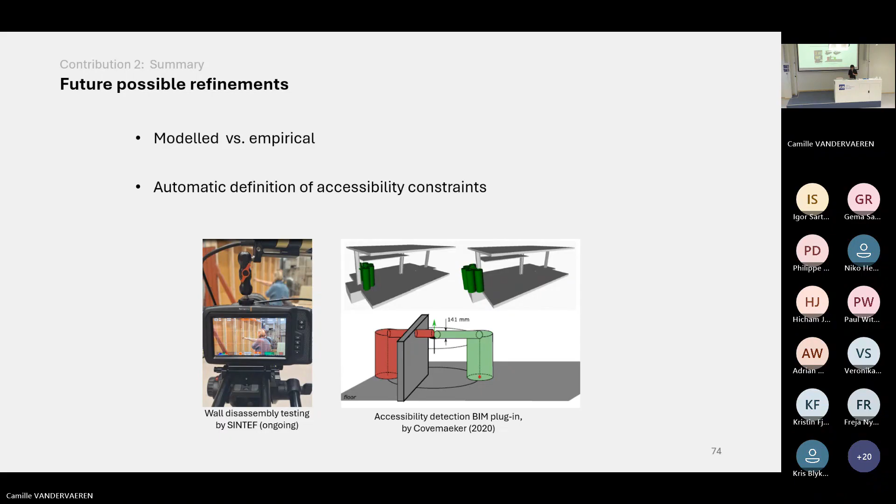Yes, in summary, my research started from critically reviewing the existing methods to assess environmental impact and material flows in buildings, so LCA and MFA, and developed a set of recommendations and findings. The first one being that the current LCA standards can limit the assessment of reuse strategies from a whole life cycle perspective, as I was mentioning at the beginning of this presentation. But also that an expanded system boundary could aid in understanding the environmental impacts of relocation and reuse.

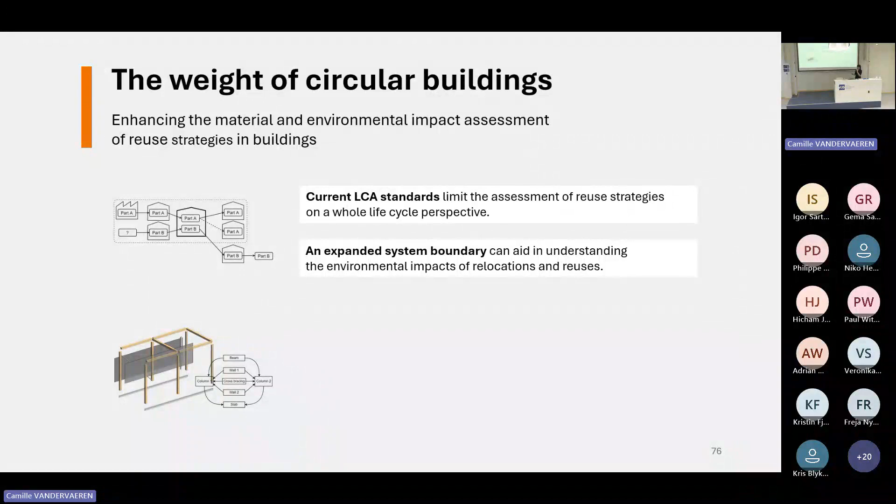Thirdly, that the impacts of replacements are likely underestimated in current LCA calculations. And it could be interesting to consider the effects of DfD in life cycle assessments, and that could be enhanced by applying this DNA method that was developed in the research.

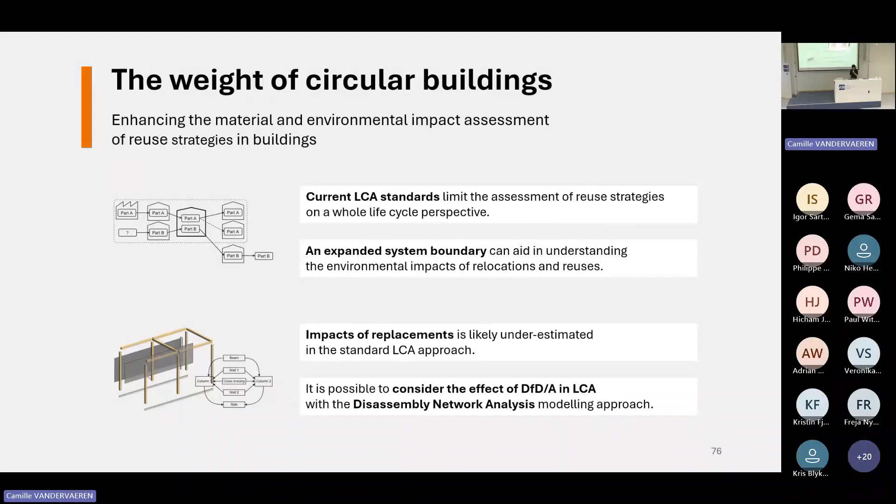So concretely, for architects or anyone involved with life cycle assessment of buildings, it could be interesting to think of reusable products not as the use of the product in one place by one actor, but more like a consumer good, like the coffee machine. If I move it and I give it to someone else, the end of life of this coffee machine is not ending there. We can continue considering this machine as still having a use, a proper service life, and then test this expanded system approach.

Then it could also be interesting to assess various scenarios for the future reuse of building parts and identify the threshold values making it more or less interesting than the conventional or linear use of building products. And finally, it's also important to think of incidental waste during future replacement. So not only considering the service life of the building parts and of the building, but also that we need to remove some other building components before accessing these parts. And what are the dependencies between these parts and surrounding building parts?

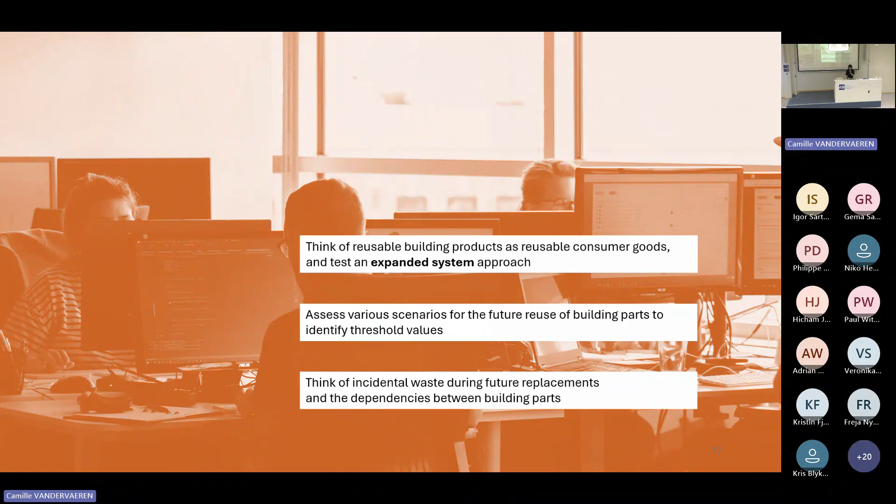So I hope that in the future, if this research keeps expanding, we'll get not only an energy performance of the building, but also a material performance of the building, with hopefully not just the construction impact, but the whole service life of the building.